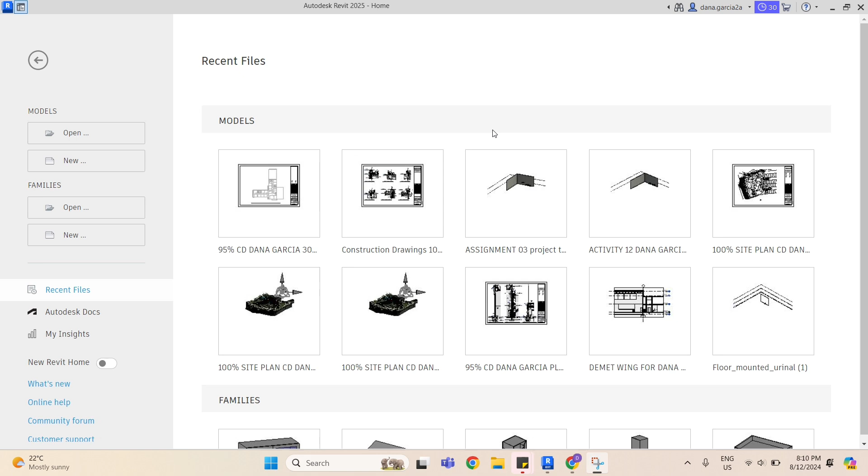So first, we go to Revit, and what I will do is open the families. I will open a new family and then choose English and go ahead and choose metric casework. So once in the family, we can see that we have the reference level and the front elevation.

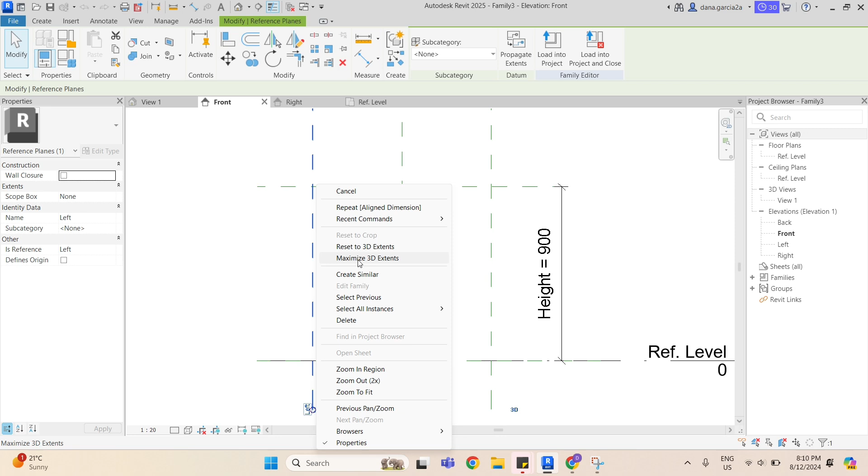But to start doing the framework, what I would do is start making the new reference planes and decide what thickness I want to do. So for that, we go to create similar and then choose to pick a line. And for this frame, I'll do 20 millimeters and set up the new reference planes, always to the inside.

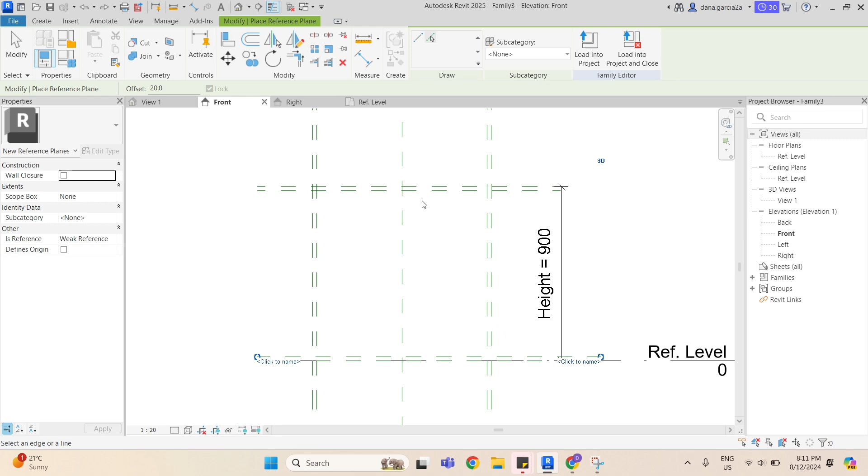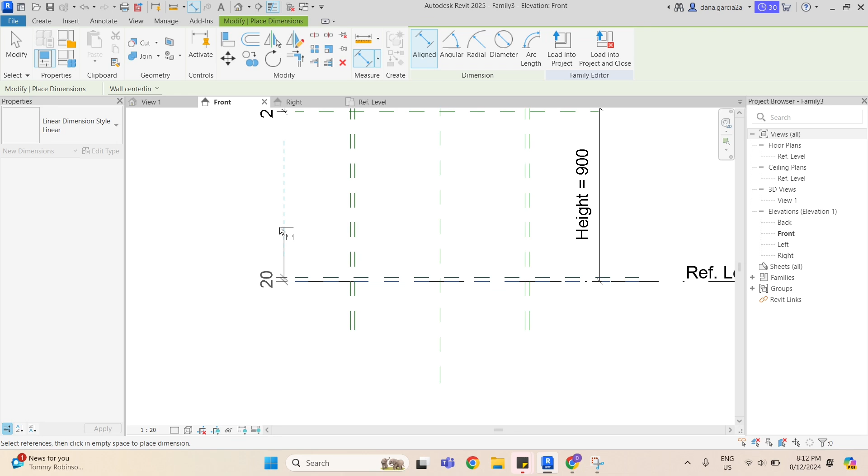So after I've done all of this, I'll check and then I'll dimension it so that I can make the framework parametric. So for that, you always choose the main dimension and never use the dimension that you just created. So that when we flex our family, the frame itself can move with the change of dimensions of the width and length for the family.

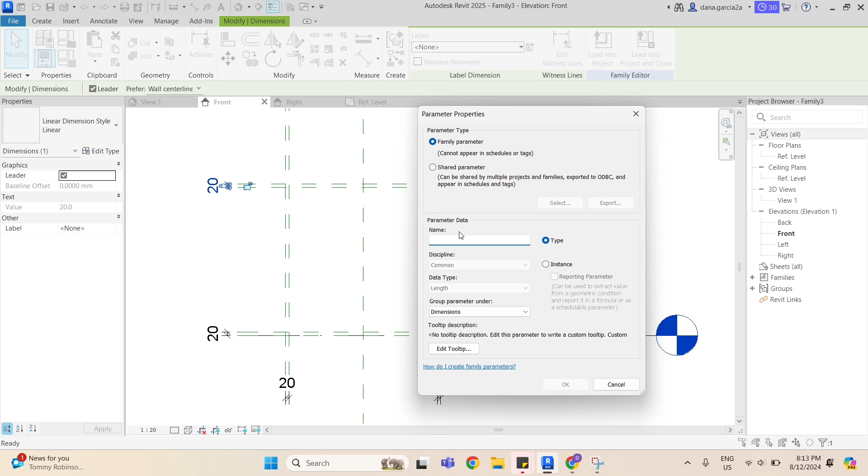So because I want to make these dimensions parametric, what I do is here on the labels, I choose new parameter and I type the name of the parameter that I want to make this dimension. So for this one, I've chosen frame thickness. And so I go ahead and select all the dimensions I've done and set up these parameters accordingly.

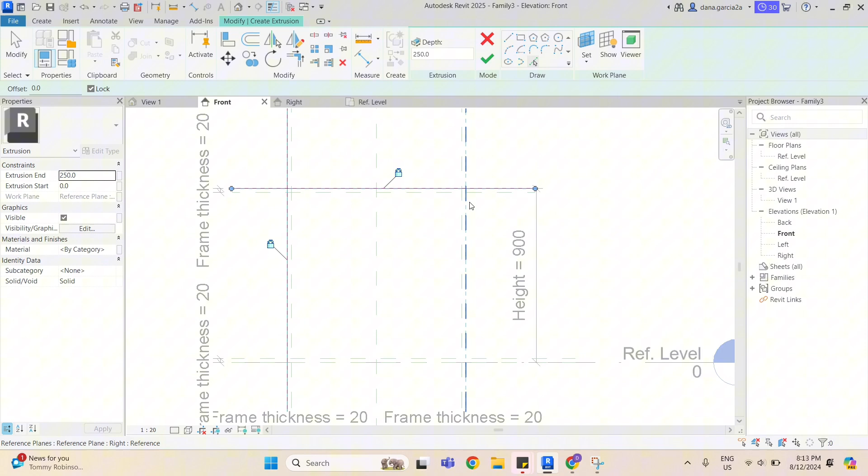So now we're doing the extrusion for the actual framework, and for that I'll go ahead and pick lines as well, because by doing this it locks into the working plane. And also I'll go ahead and choose the lines from the interior so that it creates the whole rectangular or square structure.

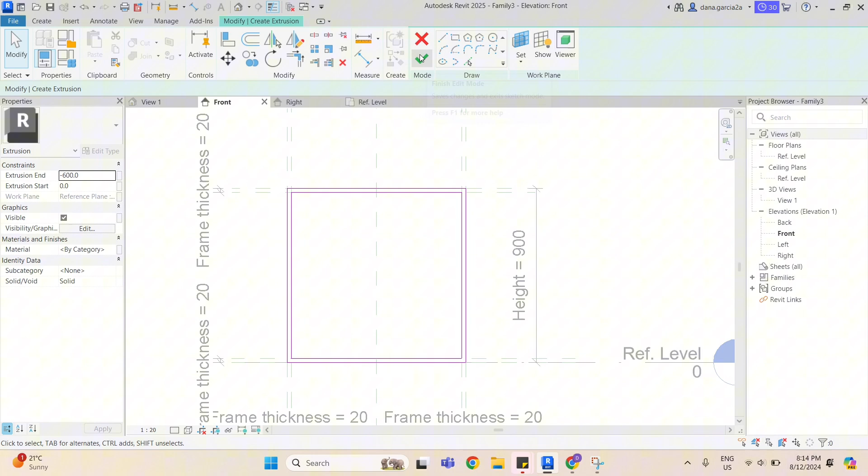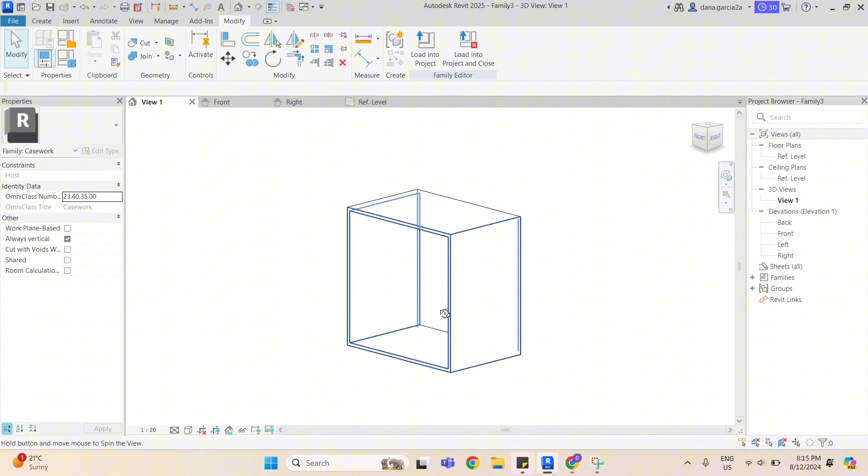I chose to do minus 600 millimeters so that the framework could align with the depth of the original planes. So now, as you can see, I've locked the back to the back plane, and now that I can flex it, all the parameters and the framework itself are going to move within those working planes.

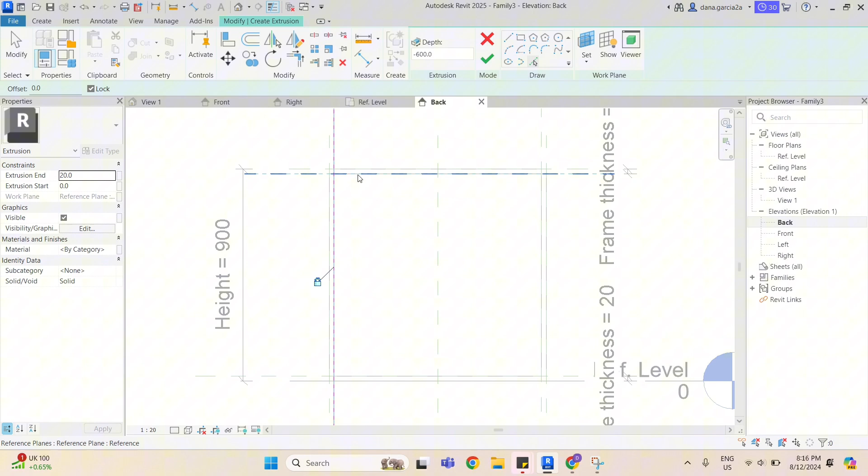So there you could see how the family is looking, and now I'm gonna go ahead and work on the backboard. I'm gonna choose to do extrusion as well, and I have to go to the back elevation. And for this, I'll also type in the thickness of 20 because I think I will use the same material as the frame. And choose pick lines again, lock them, and trim them.

So to check that the thickness is good, you just go to the reference level, and there you can check and see that the thickness fits within the frame.

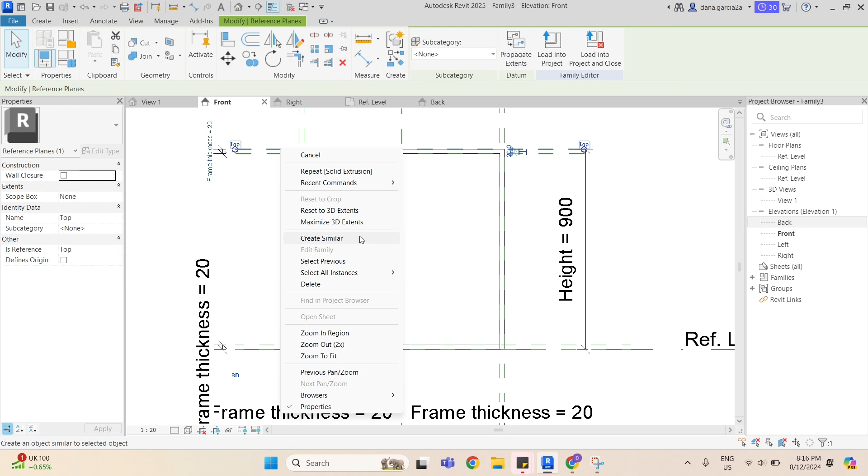Now I'm going to do the shelving system. So I'm going to do 2 shelves and I'm going to do the same steps. So create similar and add 2 reference planes. For that, I'll do 300 millimeters so that it's equally divided within the 900 millimeter height.

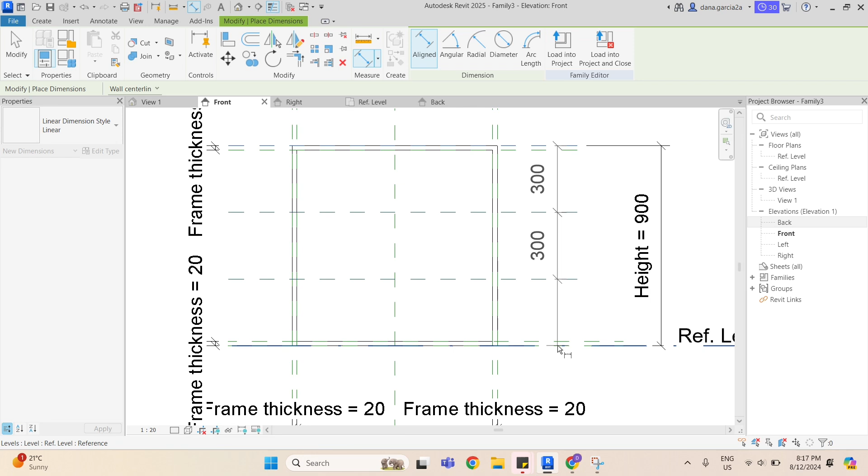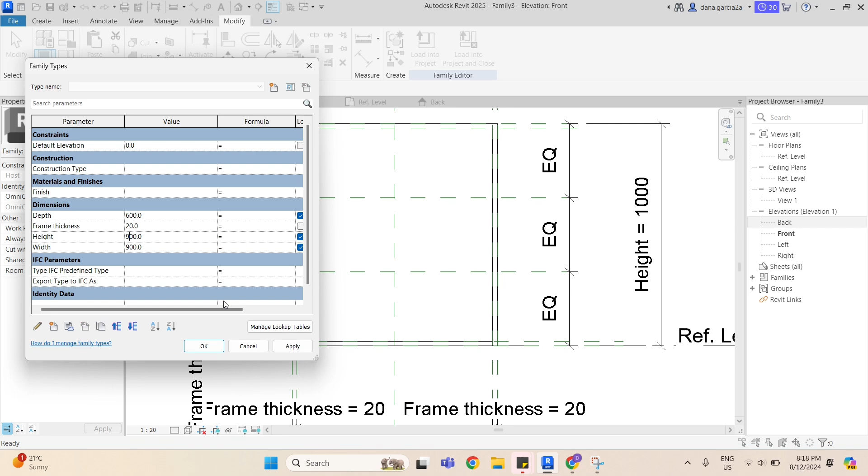And after that, I'll dimension them because I want these shelves to be fixed so that when I'm flexing the family, the shelves can be equally divided with whichever height the person uses. You can see that if I flex it and I put 1,000 there, the dimensions of the shelves move accordingly. So if I draw the shelves, they're gonna be equally divided and we'll have space for everything.

So now I'm gonna go ahead and do the shelves, and I've also named every reference plane, and for that I'll go to reference level and align it with the reference plane of shelf 1 and shelf 2. So once again, I go pick lines and then lock and then make my shelves.

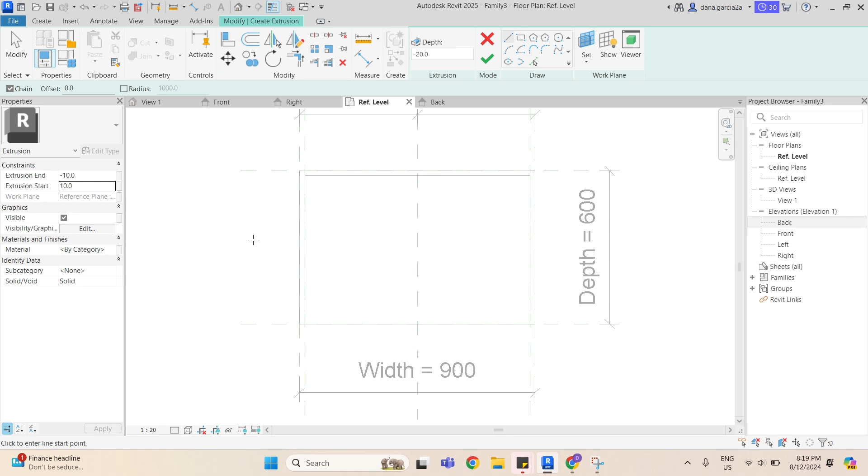I'll choose a shelf thickness of 20 millimeters, but for that I'll set the extrusion end to be -10 and extrusion start to be 10, so that the shelf sits in the center of the reference plane of shelf 1 and shelf 2, and there's equal space for the shelving.

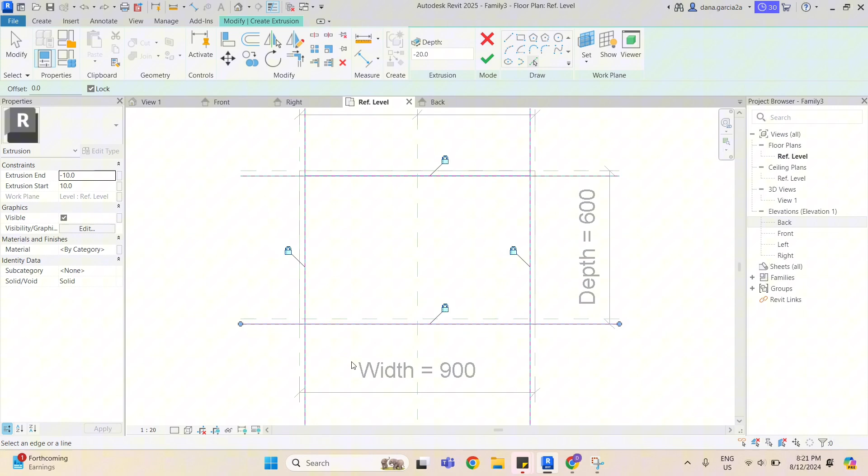So I select the lines, and then for the front I make sure to locate the line of the front with the doors, because the doors are going to be pointing outwards. So I have to make sure that the shelving goes all the way, aligned with the framework of the family.

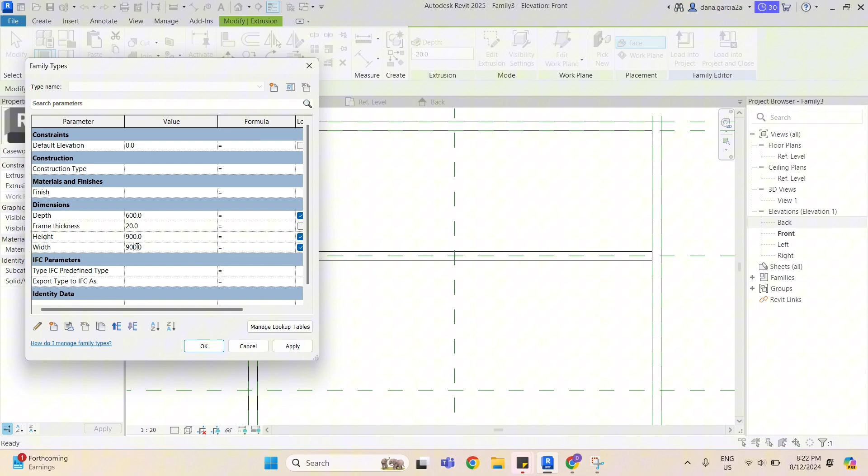So now I will flex this family and check that the shelving extends and moves with the framework. And yeah, it does.

So here you can see how the family's looking, and now I've gone ahead and done shelving number 2 with the same steps as the first one.

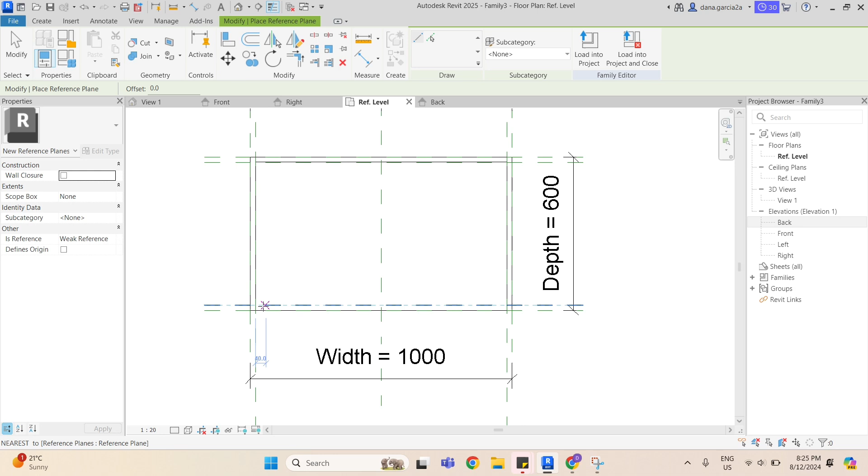Now I'll do the doors, and for that I have to create a reference plane of 5 millimeters, because the doors are going to be sitting with hardware, so we need to create that hardware space of 5 millimeters before drawing the doors.

And because I want it to be fixed, I have to dimension this reference plane and leave it like that, not make it parametric.

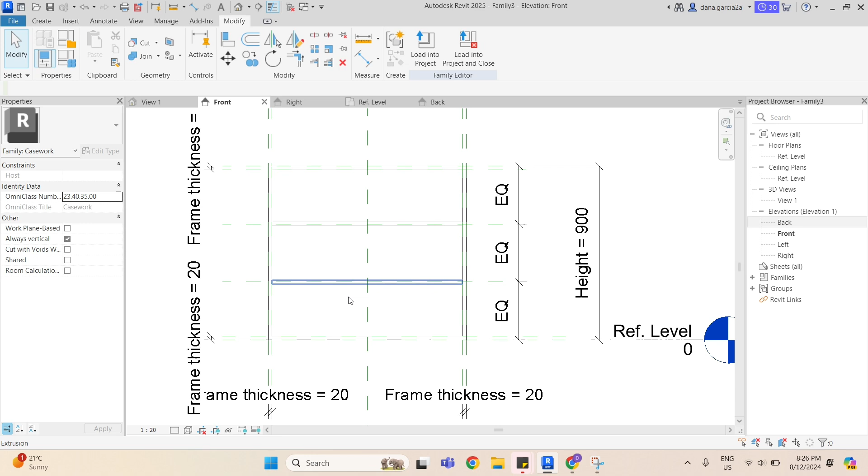I also need to create a name for this reference plane, which I've chosen to be door panel, so that I can go to this front elevation, choose the reference plane door panel, and then start making the extrusion of my doors.

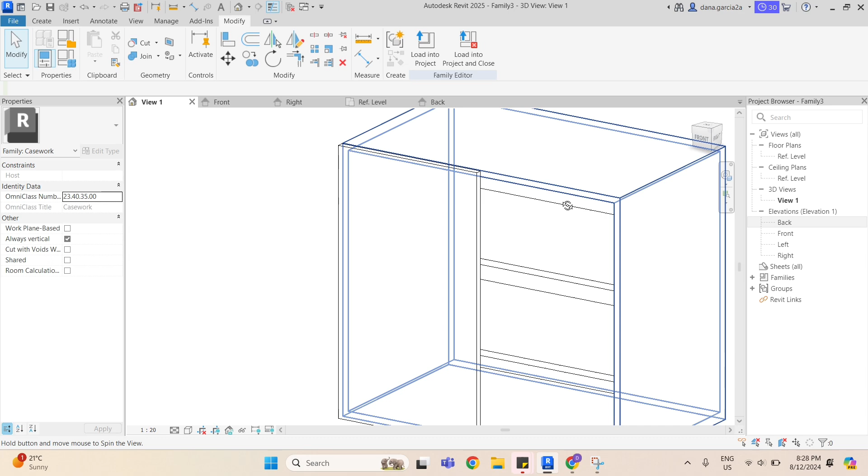So then I go ahead with the same steps, choosing the width and the reference planes, and I've done both doors.

So now I won't put any material, but I do need to see glass inside the doors, because I want to make this family a cabinet pantry with glass doors.

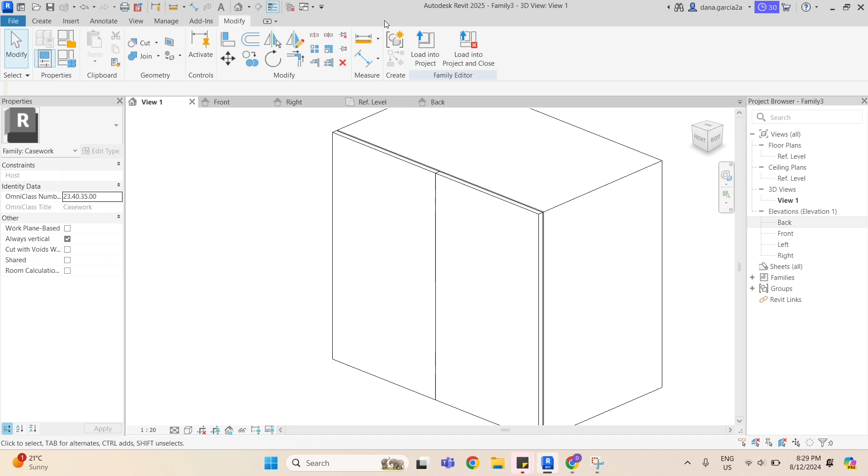For that, I've created a new reference plane and named it glass panel. This is also going to be fixed, so I have to dimension it, but for now I've placed it in the center of both doors.

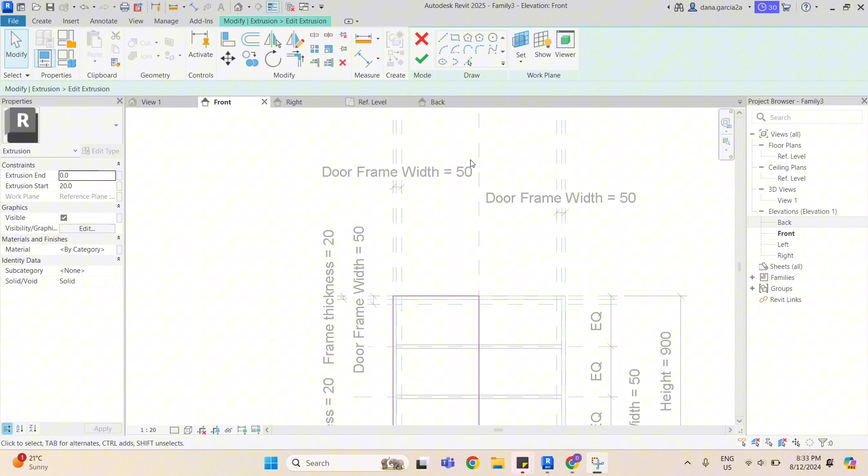So for that, I have to create new reference planes in order to create the frame of the door first before the glass panel. But after that, I have to just edit the door panel and create a square inside this door panel, so that afterwards I can place my glass panel.

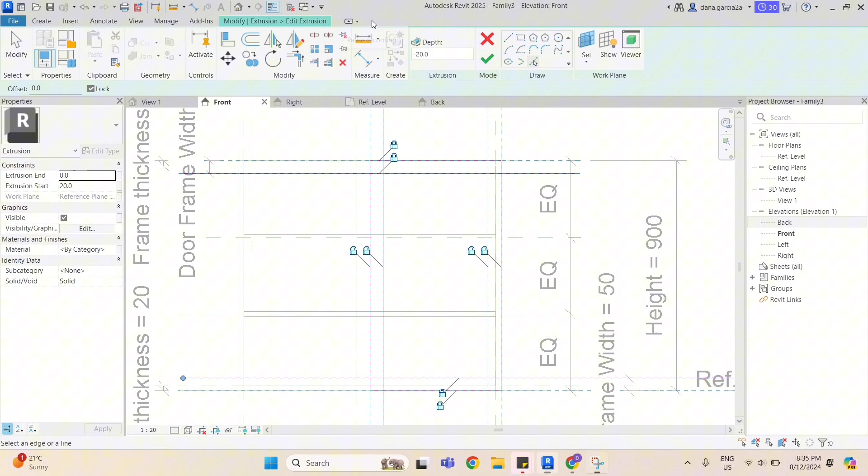So here you can see how I am editing the door extrusion and then locking it within the new working planes that I've chosen to be the parametric frame of the door. I've named this parameter door frame width.

Just in case users want to make it thicker or thinner and make the glass panel bigger or smaller.

I've already placed the extrusion of the glass panels, but I want the glass material to be fixed. So only for this case, I will make the glass panel fixed, and I'll do it from this family.

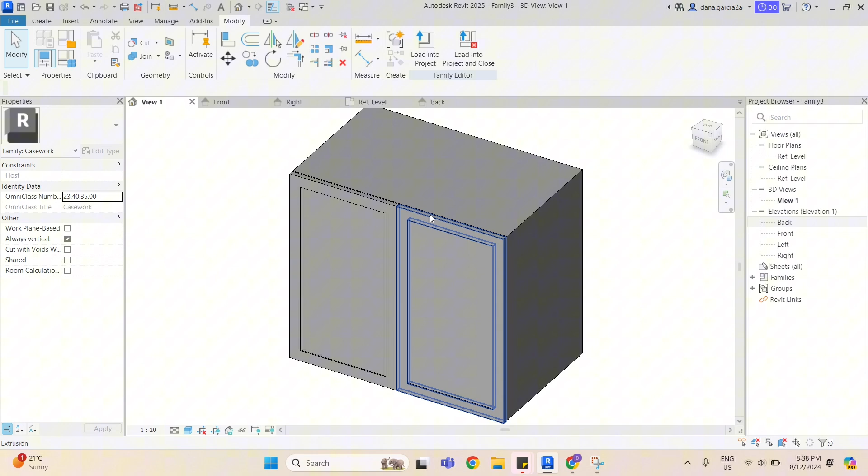I'll go into the materials and choose glass. There I've chosen glass with low E coating, and you can see that this means that once you go to the project, the glass is going to be a fixed material.

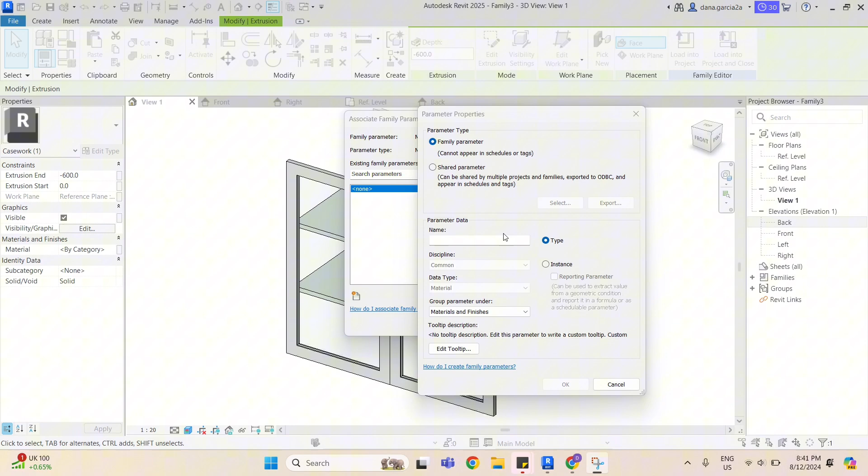But here I am creating a new parameter for all the other materials of the frame, so that users, if they insert this family into any of their projects, can change the material of the family from the project, so they don't have to create new families in order to change this.

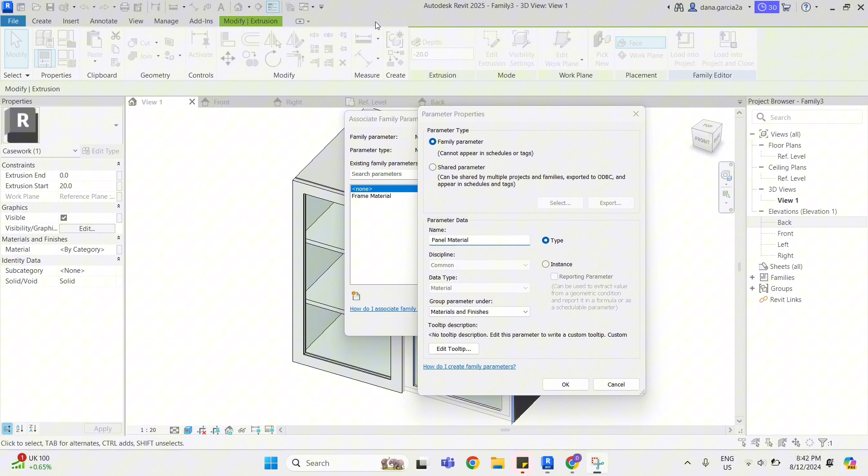You just go ahead in your project and change the material, and then duplicate it and change the material as many times as you want to do it.

So I've created the parameters, and I've put frame material, panel material, and shelving material as well.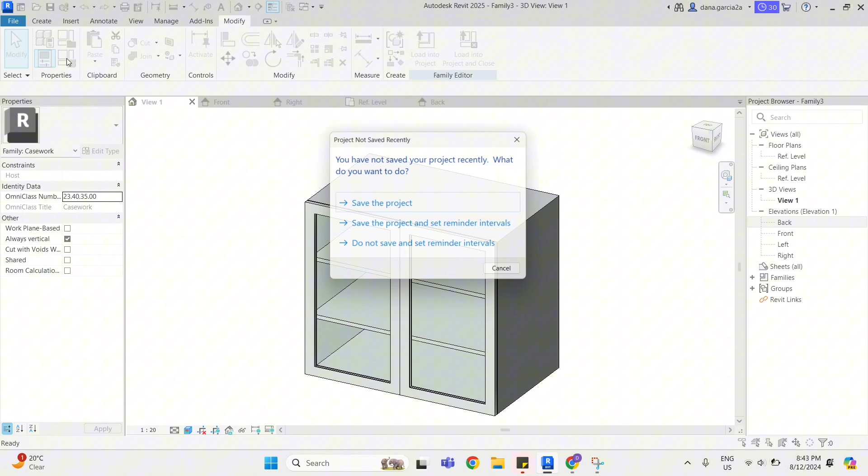So now I will flex it, and for that I will just create a new family, and then change the measurements like width and height, and change it accordingly to the project that you're working for, so that people can also change their families or even just insert these families into their projects.

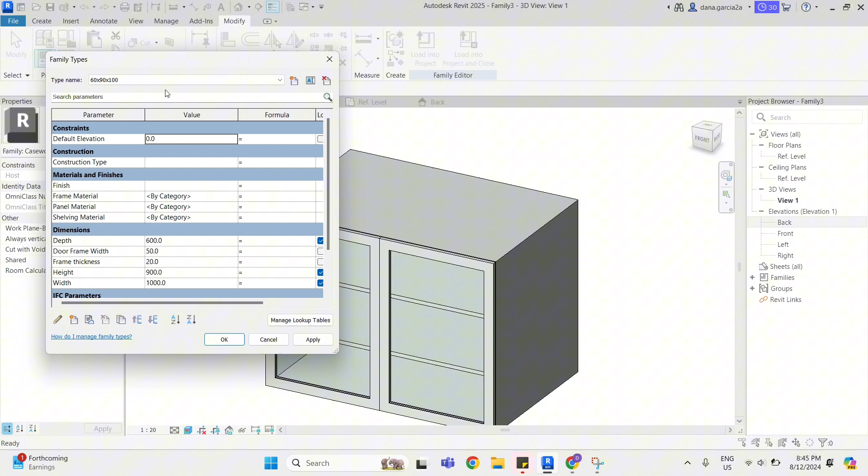Here I've created 60 by 90 by 100, as well as 80 by 90 by 120 millimeters. So yeah, that's how you change the materials.

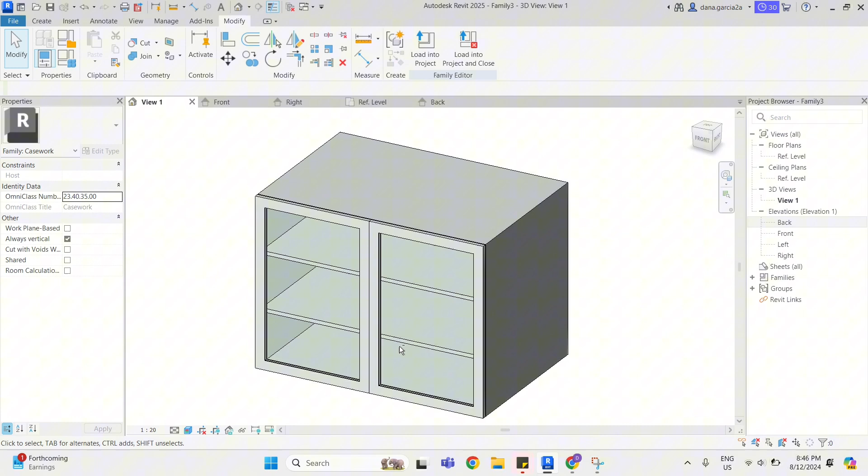You can change them on your own project, but the glass will remain as a default material for this family, and that's how the family would look.

So thank you, Professor, and this is my shelving unit with glass panels in the doors. Thank you.